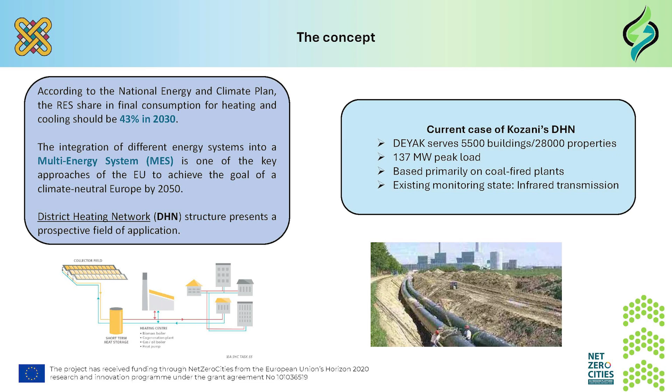Okay, we all know the general framework. We know that with the national energy and climate plan, we want to go to a wider penetration of RES, especially in the heating and cooling sector. This is a critical thing because in electricity things perhaps can be simpler due to the easier transmission and storage, but the heating and cooling sector is one sector where we also want to increase the penetration of RES. We know about the city of Kozani. We have talked a lot about the district heating system. I will not go into detail, so Yannis, please, let's go to the next slide.

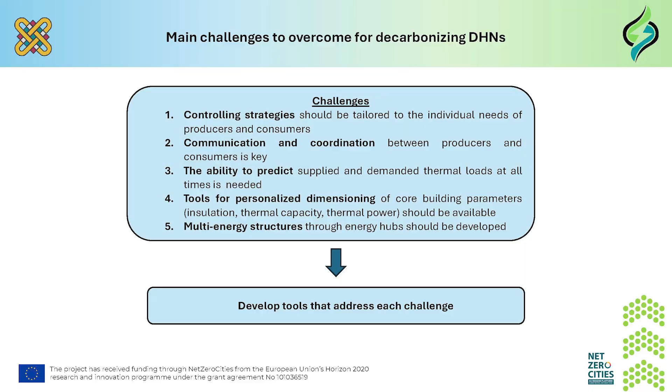It's not only knowing the technology or having developed package solutions, but we need also for the city, for our city, and this is a good point to stress it. We have to find capital in order to implement, because now we don't talk only about pilot projects, but we talk about the everyday life of a city. Okay, that's very important. Yes, please, Yannis.

Now, two things about controlling strategies. In terms of monitoring, it's very important to put something here now. We have to monitor in detail the demand of every house that participates in the district heating network. This is a very important infrastructure that has to be installed and deployed.

Okay, in terms of controlling, we can talk about peak shaving. We have peak shaving now with the photovoltaics. We give various incentives to people when they are at work. We say, okay, you have to go home and put the laundry and then go back to work and that stuff. I mean, we had the night operation some years ago.

Now the PPC in Greece gave us some opportunities, some incentives to increase our load also at noon time. Load shifting, of course, is important. And the challenges on this, as I said, monitoring requires sensor placement. That's important. We have to put sensors. And also we have to transmit this information. This is very important.

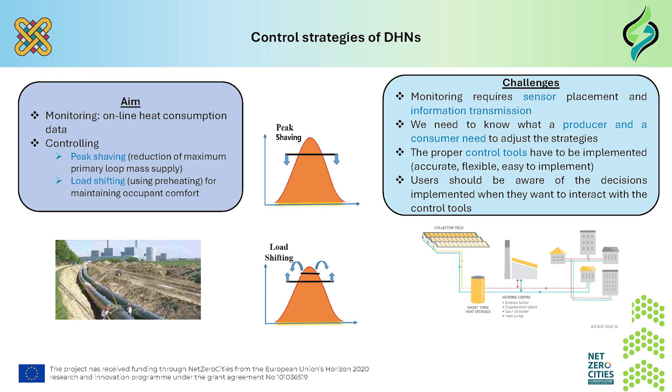Okay, the strategies have to be developed. We have to see these control strategies, and the tools have to be accurate, flexible, easy to implement. We can also find some other words to describe the effectiveness of these strategies after all. Yannis, we may.

And at the end, as you see here on the left side, we have the monitoring aspect. I will talk about this hardware platform that we have developed at the university in collaboration with the DEYAK in order to take the data from the thermal meters that are in each house. We have the monitoring aspect, we have the controlling aspects.

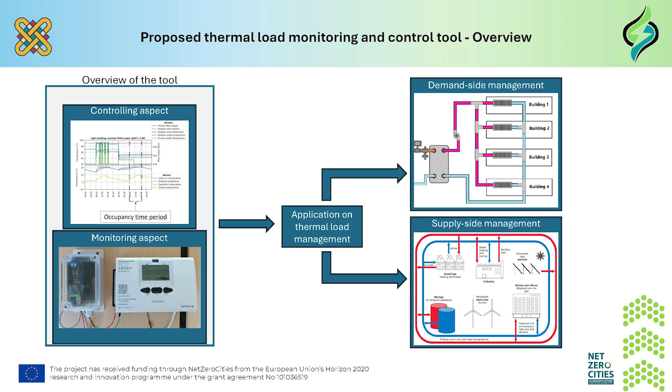It's somehow complicated, I will not go into the detail, but what we want to do after all is to implement what you see on the left, the control and monitoring features, in each house, that is the demand side, but also on the supply side. So we need to apply this thermal load management. Yes, Yannis, we may go on.

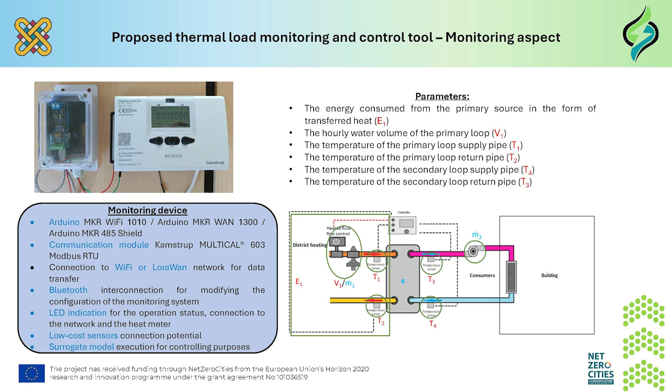And in order to be more specific, I told you it will be somehow technical, what you see on the upper left is a module we have developed, a monitoring device based on Arduino that communicates with a module of the Kamstrup heat meter that the DEYAK uses. And after all, this allows us to have online data on a cloud. It's very cheap to install and it can give us the data that we need.

Online hourly data of each house. And you see on the bottom right the heat exchanger. Here on the left is what comes from the DEYAK, and on the right is what we have in each house. So we have to measure flow rate, temperatures. Sorry for this, but we need all this information after all.

Okay. The basic idea we have, and this is what Leonidas is also working on in his PhD, and we have worked on this with the DEYAK, is to do a coordination between consumers and producer. On the right part, you see that we have the energy producer. The energy producer would give the consumer the information about the energy price, the heat load availability and the schedule. This is not fixed, but this is the information flow.

The consumer would see the potential, the opportunities he or she has, and would decide, because here we have some hard constraints, which is that the producer has perhaps a specific amount of energy at this price, and the consumer perhaps needs to be in thermal comfort conditions.

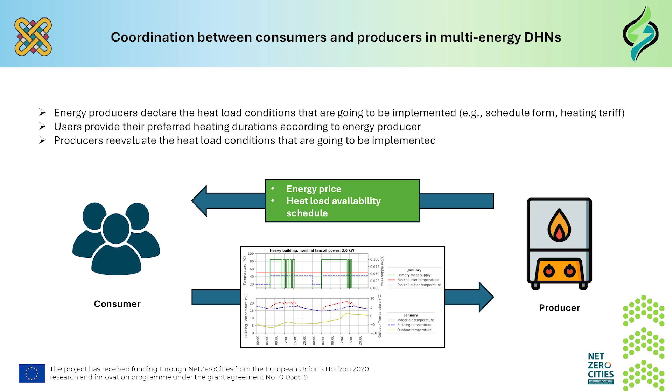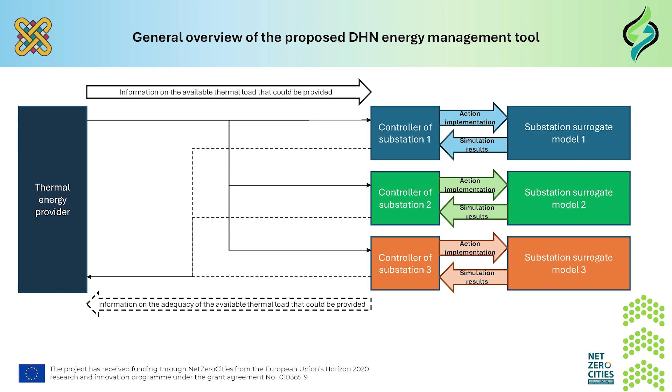So, what we are trying to do is a dynamic energy market, a dynamic communication between consumers and producers. That's the concept. On the right, you see each house, how we can implement controlling and simulation tools in each house, and on the left side, we have the thermal energy provider. The provider gives the information to the consumer, the consumer gives the information to the provider, and we have this loop after all. And in order to realize this, we need some tools.

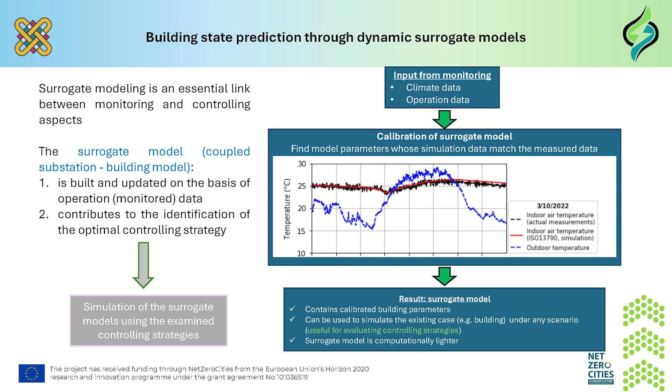And in these tools, there is surrogate modeling. Surrogate modeling is a term that is used nowadays. It's something like regression models, not physical models, but regression models, machine learning models, neural networks, whose main characteristic is that they are very light on computation, and they can be installed and adjusted to a simple controller that we have in our house. They don't need the CPU that a detailed digital twin or a detailed simulation program would need. I will not go into detail, but we need surrogate models in order to simulate the building behavior, the heat energy system behavior, and then try to match up these things.

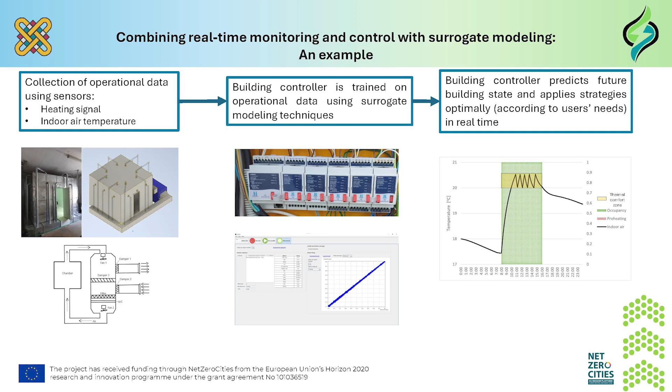This is an office. That means that at 9 o'clock we have to have 20 degrees. The controller takes the information from the outside conditions and from our scheduling, and of course it has incorporated the building characteristics, and it calculates at what time during the night this system should be on, so that when the first person comes here we have 20 degrees. This is very important because it ensures thermal comfort on one hand, while on the other hand, we don't lose energy because the system does not have to operate when we're not here. And this is just an example of how AI and prediction can be integrated on the demand side, on the controlling of a single consumer.

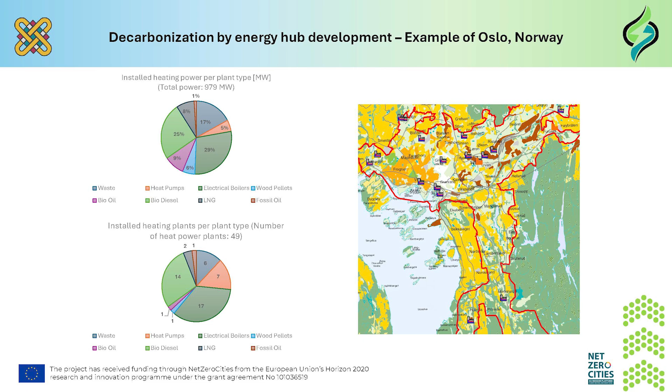And I was tempted to put the example of Oslo also, because Oslo is a very good example. Okay, no problem. When we went to Oslo, we said, okay, we would like to have a system like Oslo in Kozani also. As you see on the left, we have many technologies. We have waste, we have heat pumps, we have many technologies for Oslo, and on the right is the map where we have these different stations.

We talk about a system which is 6 or 7 times the system of Kozani in heat capacity. And Yanis, if we go to the next slide, we can see what I was telling you. We can see how all these different sources of energy are integrated on the energy system, and how at the end they cope with the demand. Of course, the demand is higher by winter time.

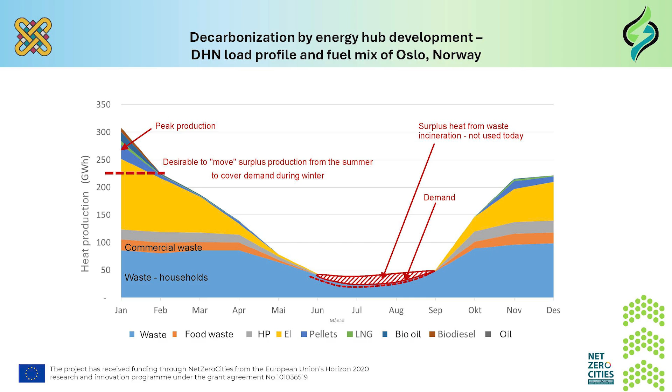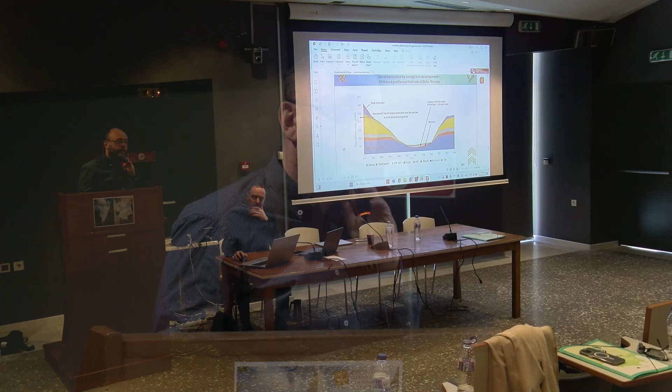We see that at summer we have lower demand, and there is some excess of energy by summer that Oslo would like to put, it's the load shifting, I tell you, on the peaks of winter time. Okay, this is just an example to show, and of course, this operation would not be feasible if they don't have a good monitoring and control system.

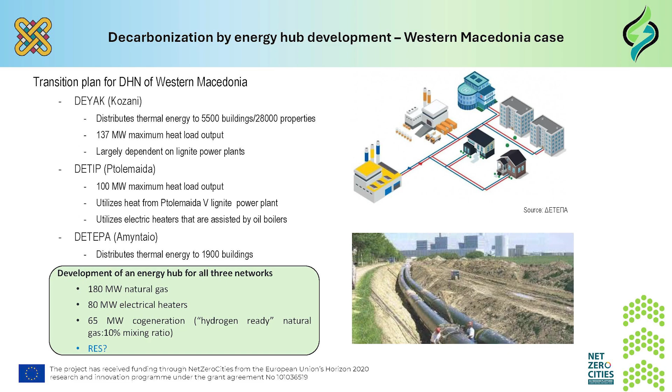This is, I don't know if this is the energy hub. This is the next step in Kozani. I think we didn't discuss it that thoroughly today. We discussed it, but we didn't show it. This is the Kozani needs, the Ptolemaida needs, and the Amyntaio would be integrated on an energy hub. We would have natural gas, electrical heater, cogeneration, and we are trying now to integrate the RES, the renewable energy sources.

Final slide would be something like this. This is our goal. What we want to do is help contribute, we as a university, but all the partners here with the different disciplines, and each one of us can be important in this difficult path. This is the energy hub. On the left side, we have different systems. We talk about how we can take advantage of photovoltaics and electricity transformation to heat. This is the case of Neutron, for example.

We have also other technologies that can help on this: solar collectors, heat pumps, biomass, waste, and of course we have more traditional technologies and natural gas. I put it at the end. I was tempted to put it at the bottom. I tried to give a little bit of qualitative priority on this. Of course, we need storage, seasonal storage, short-term storage. I think one of the main advantages of Neutron is the storage system, because it gives storage on thermal and on electrical level at the end. This is very important.

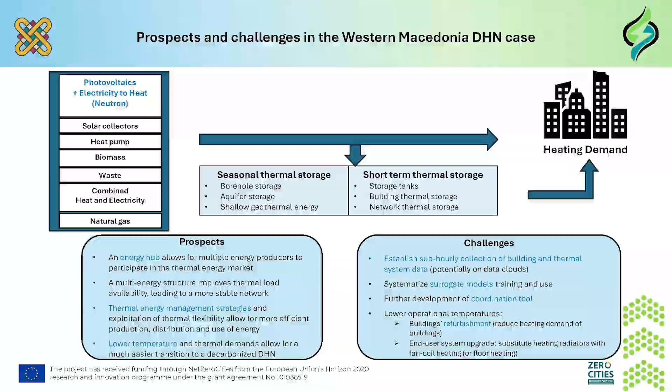I didn't put in the challenges, of course, financing is a great challenge, but our work also as a university is to propose, to demonstrate that we are able on a technical level to give the solutions, in order to offer them to the society, given that we have the right occasions.